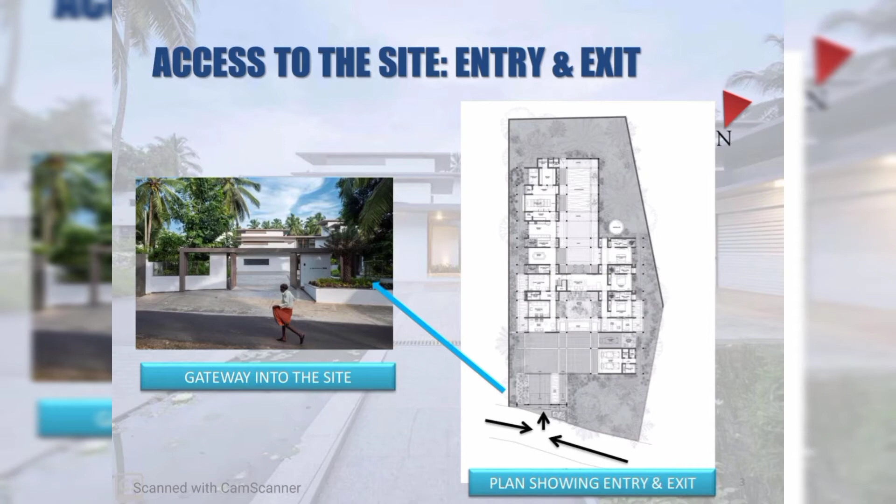First of all, here the plan shows site access. This is the only entry and exit to the site. The architect gave a wide open courtyard which the car can easily get into or out of, and exit through the main gate.

This is the orientation and positioning of the residence, a view from the road. First two views from the north side and other two from the west.

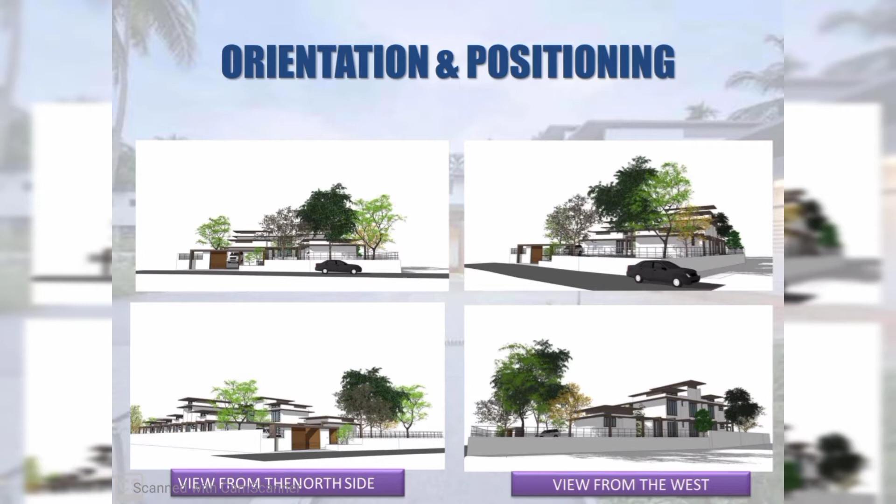To match up with the design and surrounding, the architect maintained dense vegetation to create an enjoyable medley. For the parking facilities, a porch with an area for parking 2 cars, and a garage with an area for 1 car.

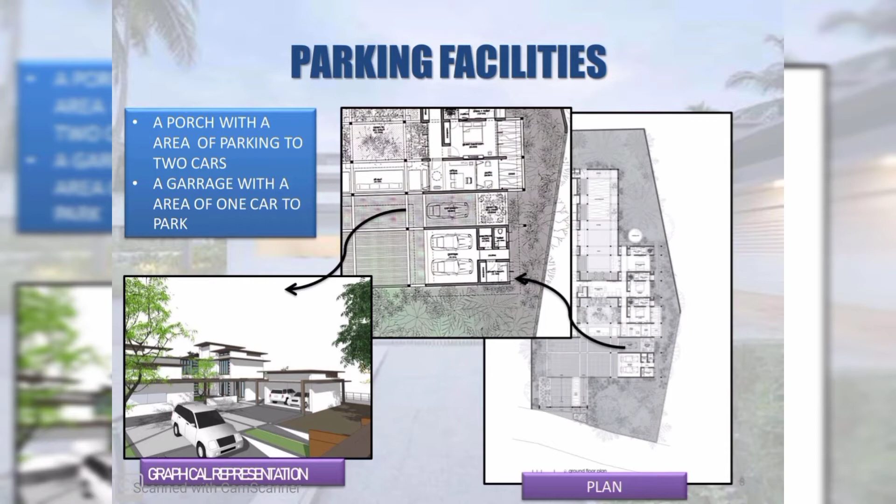Here gives a plan and a larger portion of the plan and a graphical representation showing the porch and the garage.

One of the client requirements was to keep sustainable features like solar panels, rainwater harvesting, etc. The architect fulfilled that client need by adding solar panels on the roof with natural ventilation. Also, the roof efficiently collects rainwater which is designated to a water collection chamber.

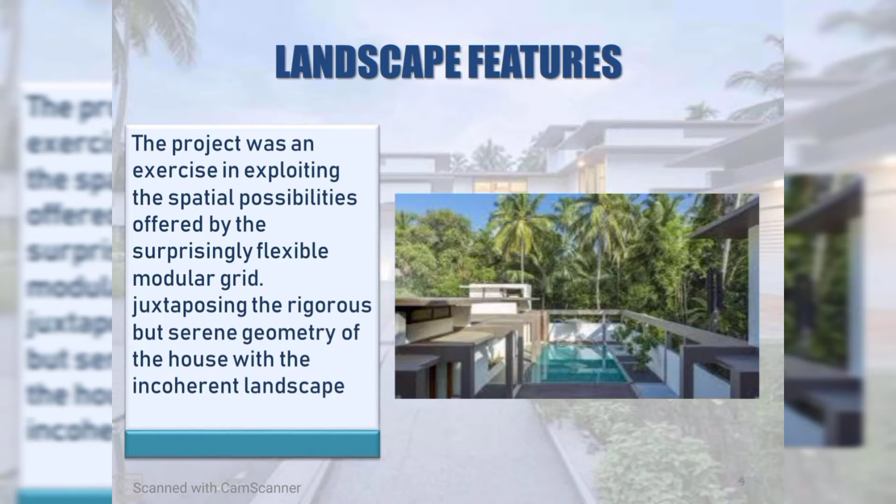The project was an exercise in exploiting the spatial possibilities offered by the surprisingly flexible modular grid, juxtaposing the rigorous but serene geometry of the house with the incoherent landscape.

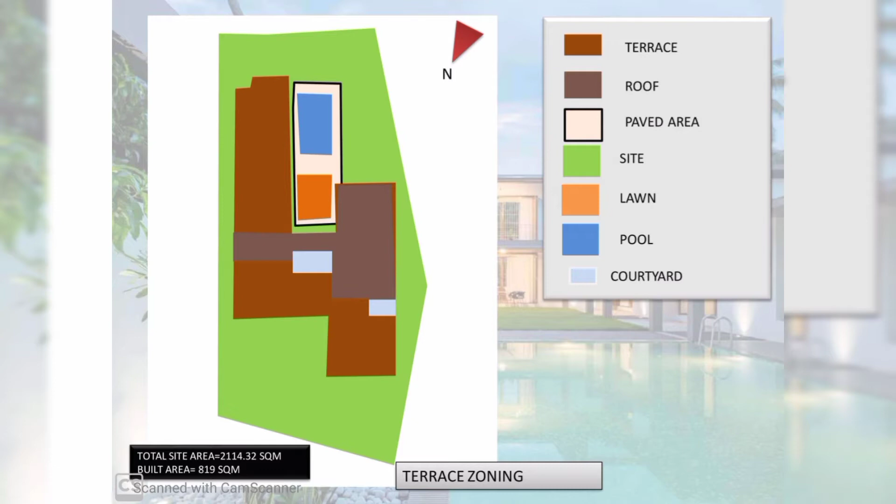And we go to the sections. We've taken the section from the north elevation. This is the first section, and in the vertical zoning shows the rooms and spaces, coming first in the section.

Here is the prayer or family living area with a double height roof and an informal living room. In between these two spaces comes the stairs to the family living in the first floor, and again stairs to the bedroom. Next section, same from the north elevation.

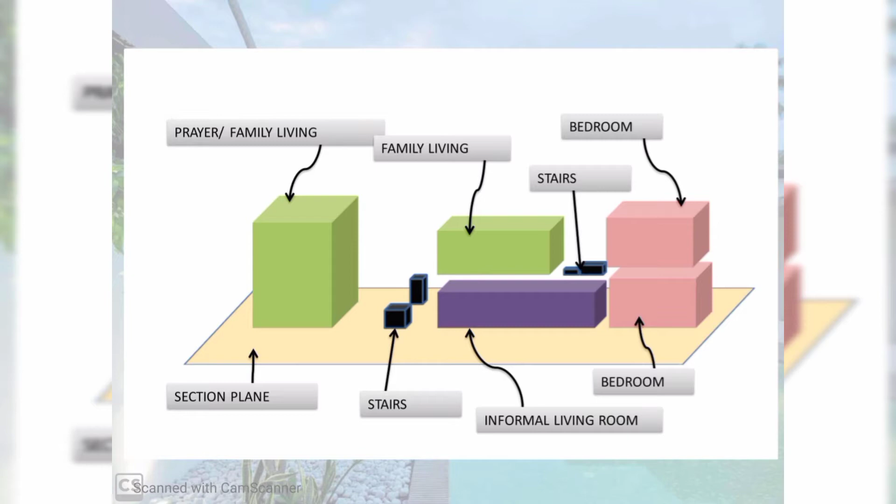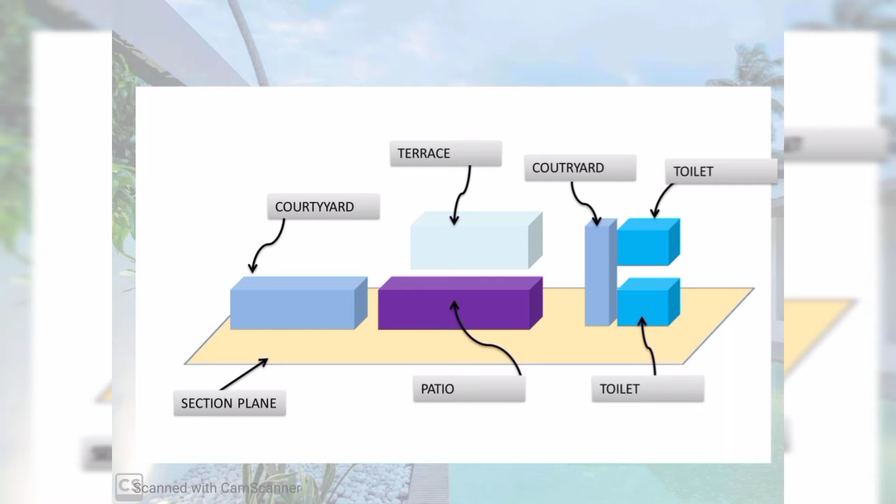With the internal courtyard, between the internal courtyard and patio, there is a passage to the next space without interrupting the circulation. On top of the patio is a terrace or balcony which is open from the family living in the first floor, and again a small courtyard near the toilets in both floors.

Section 3. The breakfast area with the open kitchen, and behind the kitchen there is a kitchen yard. These spaces also open to the lawn area, and the toilets are on the other side with a courtyard near to it.

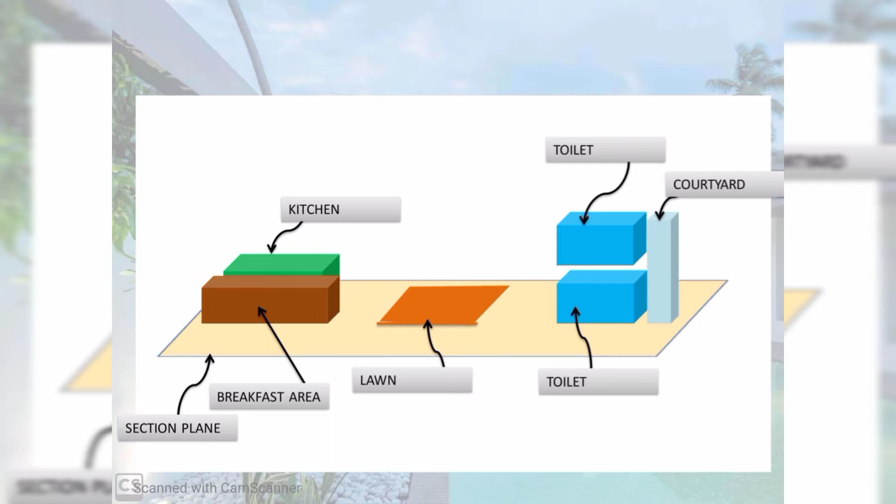The spaces are arranged based on the center of attraction. First of all, the sit-out. The sit-out is mainly attracted by the 3 fully opened walls, which face the large interior courtyard. It also leads to the formal sit-out and office space on the opposite side.

And then comes the other spaces with their designs and arrangement. Lijo Reny Architects has taken full advantage of Kerala's sunny tropical climate with its design of the house within the grid, a luxury residence that produces all of its own energy via rooftop solar panels.

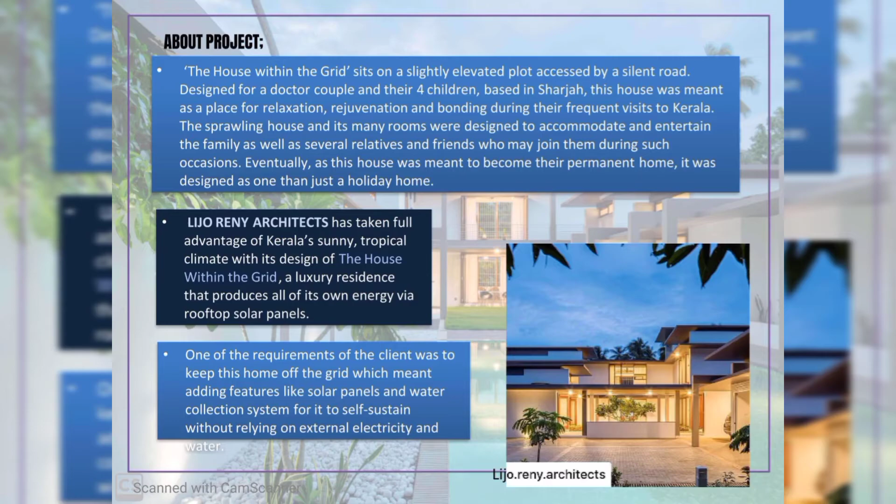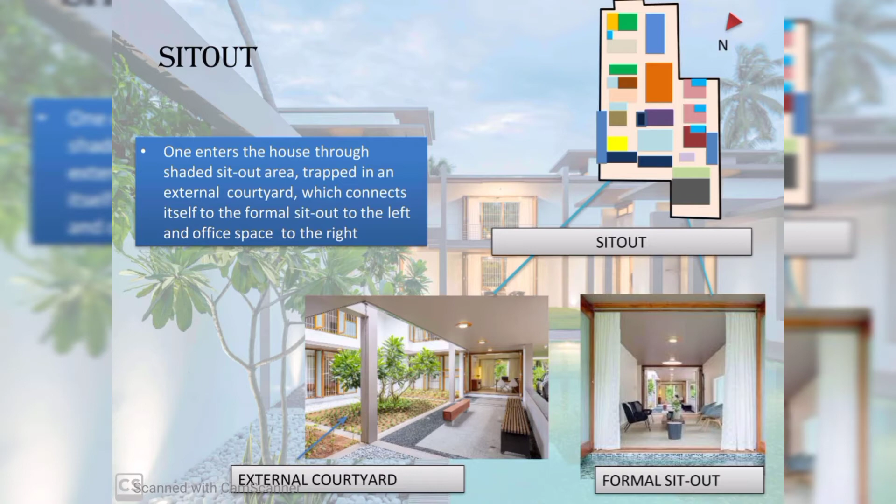One enters the house through a shaded sit-out area trapped in an external courtyard which connects itself to a formal sit-out to the left and an office space to the right. The staircases were positioned in these zones to make the circulation far more efficient.

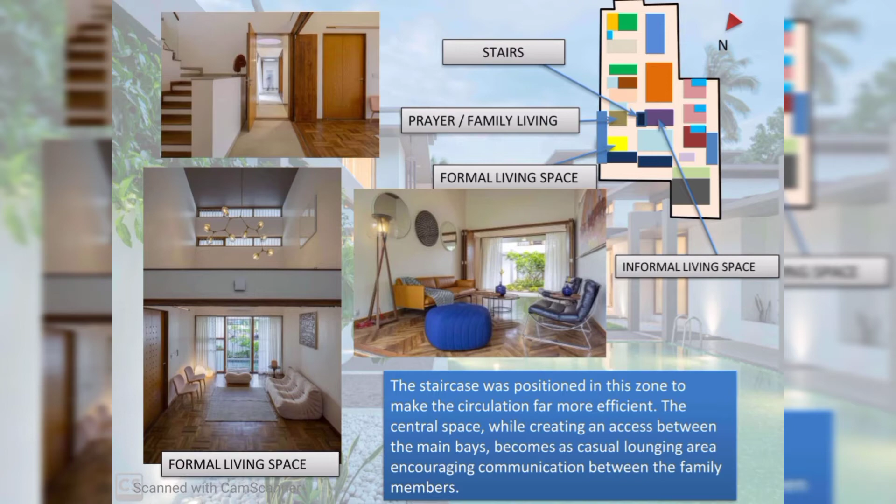The central space, while creating access between the main bays, becomes a casual lounging area encouraging communication between the family members. The spaces providing ventilation.

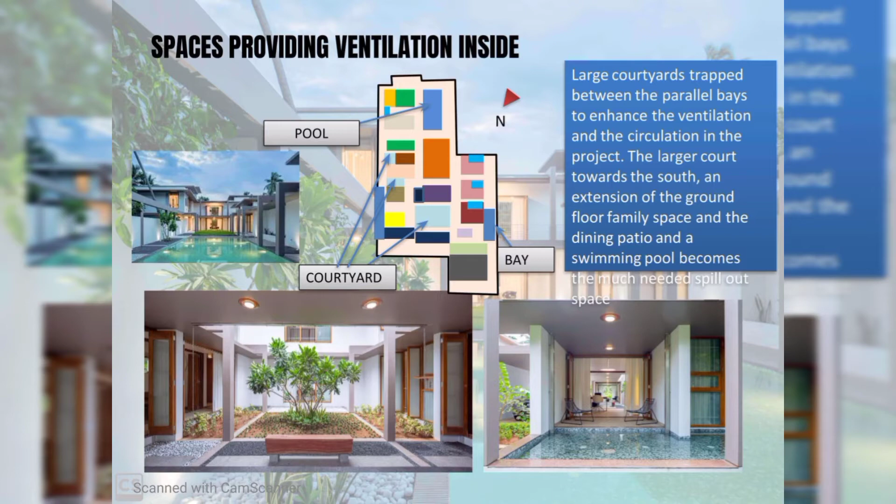A large courtyard trapped between the parallel bays enhances the ventilation and circulation in the project. The large court towards the south is an extension of the ground floor family space, and the dining patio and swimming pool become the much needed spill-out space.

The work areas: on the ground floor, the work area like the office is situated at the west side, and the dining room, breakfast area, and kitchen are situated at the east side.

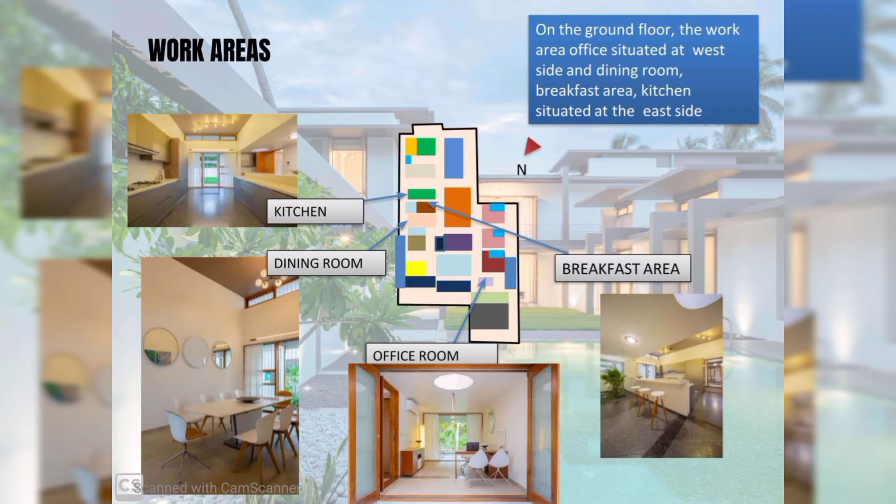The theme of the design: the house is composed of two distinct parallel bays connected in between. Each of these bays consists of a set of defined functional areas and a linear circulation spine that dissolves into the parent room wherever possible. A mix of primary and secondary function with its two different room widths creates a visible repetitive spatial pattern throughout the house.

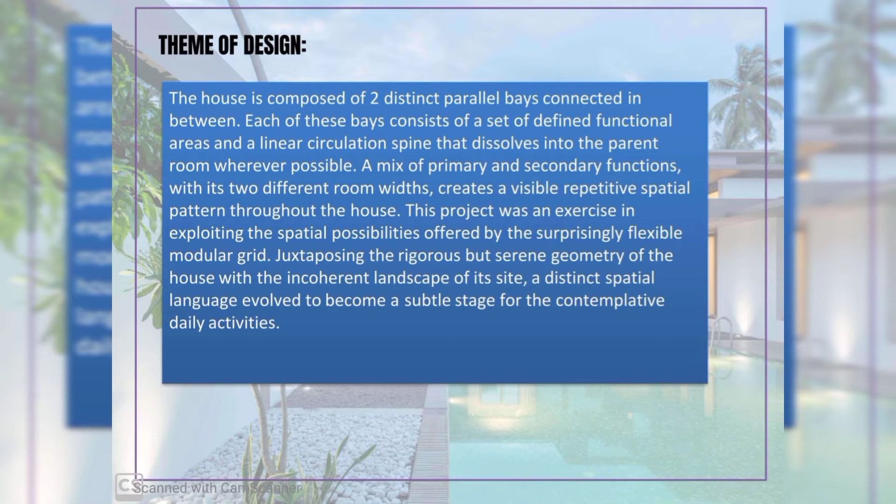The architects divide the home into two connected distinct parallel bays: a single-story bay housing the public and semi-private areas on the east side, and the double-story bay on the western side that comprises 6 suite bedrooms and a compact office space. Two large courtyards are located in between the bays.

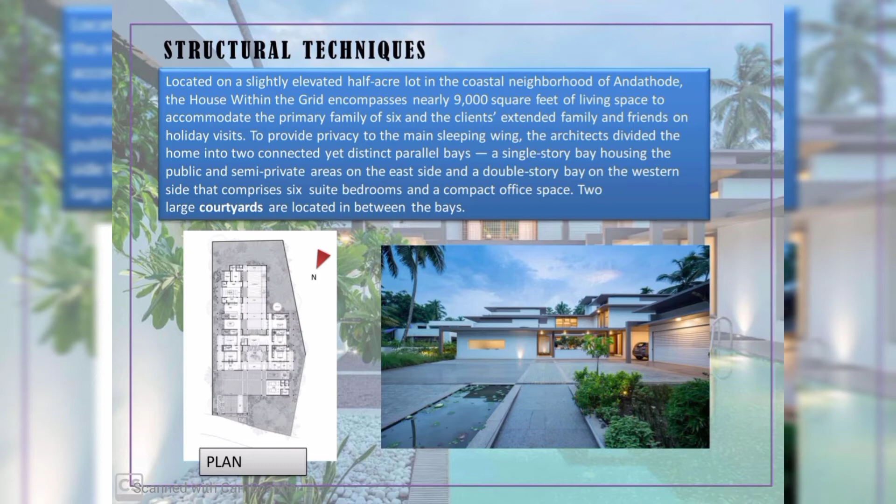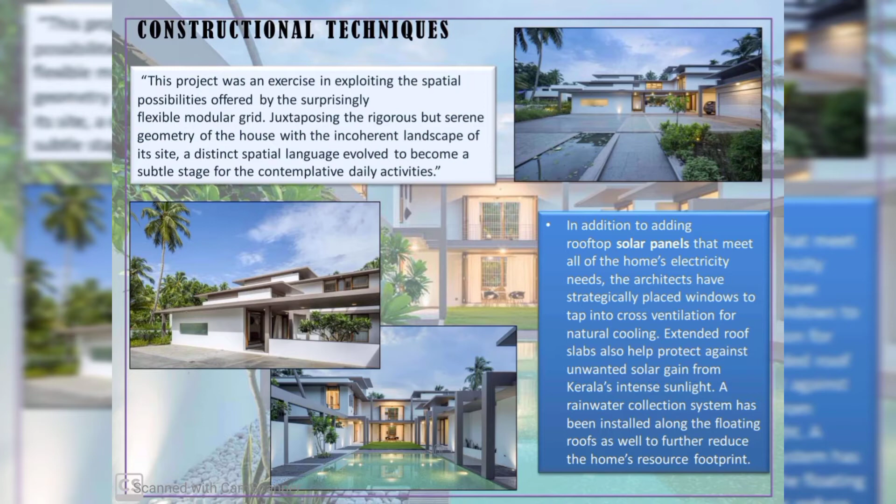Constructional techniques: this project was an exercise in exploiting the spatial possibilities offered by the surprisingly flexible modular grid. In addition to adding rooftop solar panels that meet all of the home's electricity needs, the architects have strategically placed windows to tap into cross ventilation for natural cooling. Extended roof slabs also help protect against unwanted solar gain from Kerala's intense sunlight. A rainwater collection system has been installed along the floating roof to further reduce the home's resource footprint.

Material study at site level: cobblestone and granite stone are used for the outside courtyard, and lawn grass is used for the lawn area. Steps: the stairway design is set in wood, featuring wood steps that are the same color as the hardwood floors in the living space. The railings, however, are painted all white.

Material study at building level: Kajaria vitrified tiles and granite are used for flooring of common spaces like office space, sit-out, formal sit-out, etc. Nitco tiles are used for the flooring of the praying area, family living, and bedrooms.

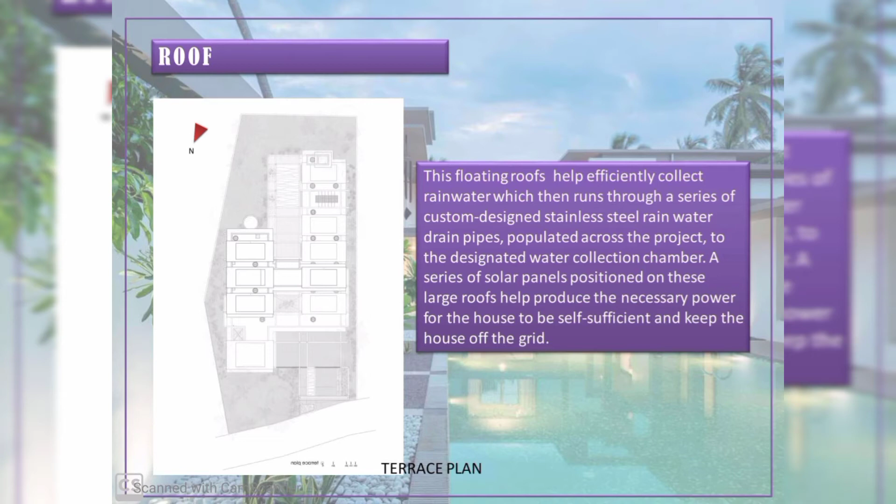These floating roofs help efficiently collect rainwater, which then runs through a series of custom-designed stainless steel rainwater drain pipes populated across the project, into the designated water collection chamber. A series of solar panels positioned on the large roofs help produce the necessary power for the house to be self-sufficient and keep the house off the grid.

The kitchen: silver metals and white color give the kitchen an elegant look. The architect has taken full advantage of Kerala's sunny tropical climate. The strategically laid out plan, while providing privacy to the family members, also facilitates cross ventilation by channeling the seasonal shift of predominant wind through its space by virtue of its orientation. This keeps the rooms as airy as possible, maintaining the internal temperature at a possible low. The undulating volumes, along with the several cantilevered slabs, shade each other in the shifting tropical sun.

Form of the structure: the design looks like rectangular boxes constructed in a grid-like structure. I hope you all understood our case study about the Indian context, the house within the grid.

Thank you. The Toblerone House, Brazil.

The whole project of Toblerone House spans over an area of 1453 square meters, with the house taking up around 590 square meters. Located at Sao Paulo, Brazil, this project was accomplished in 2011 by architect Diana Radomysler and Marcio Kogan of Studio MK27.

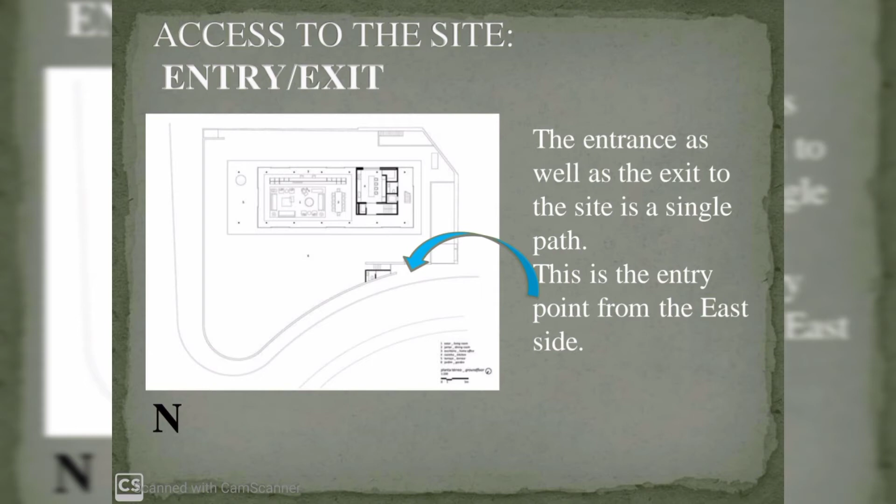The entrance as well as the exit to the site is a single path. The arrow shows the entry point from the east side. Further, the parking shed is shown. The shape of the land allowed for a longitudinal implanting of the house, with spatial permeability between the two extreme areas with a loose canopy in the garden.

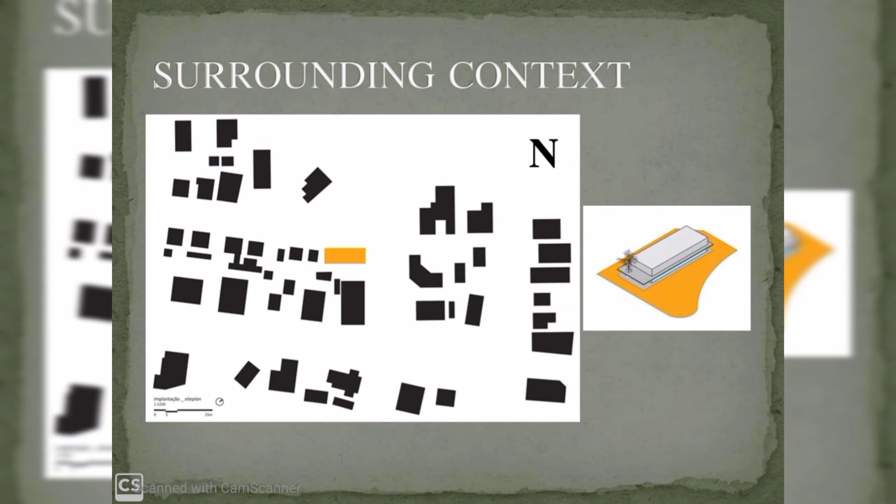It's well kept in the natural landscape and has interior done to match this feature. The nature surrounding the site is mostly left as it is. The interior has been decorated in muted shades in order to remain sympathetic with the natural landscape around.

Landscaping choices can make a big impact in building water consumption. By using trees, plants and grasses that are native to the area, irrigation needs are reduced. By planting trees that shade the roof and windows during the hottest time of the day, solar heat gain inside the building can be reduced.

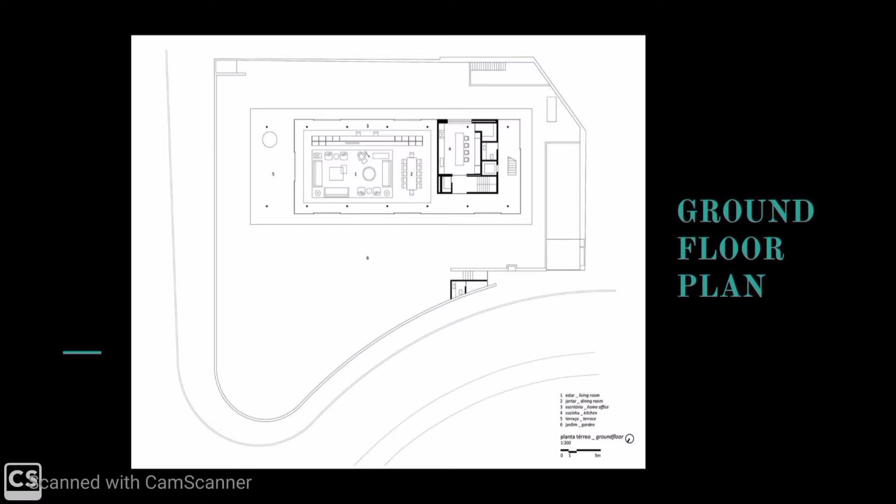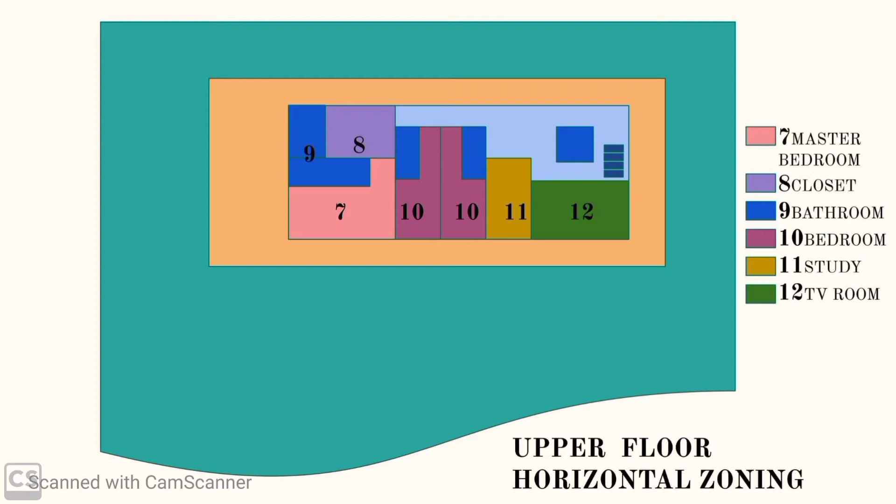Beginning with the front view of the residence, what comes next is the ground floor plan of the two-story building. It consists of a living room, a dining hall, and an office integrated together with a kitchen nearby. The stairs then take you to the upper floor, which has a home theater, a study, 2 bedrooms with attached washrooms, and finally a master bedroom with an attached closet and washroom. These are the horizontal and vertical zoning of the respective floors.

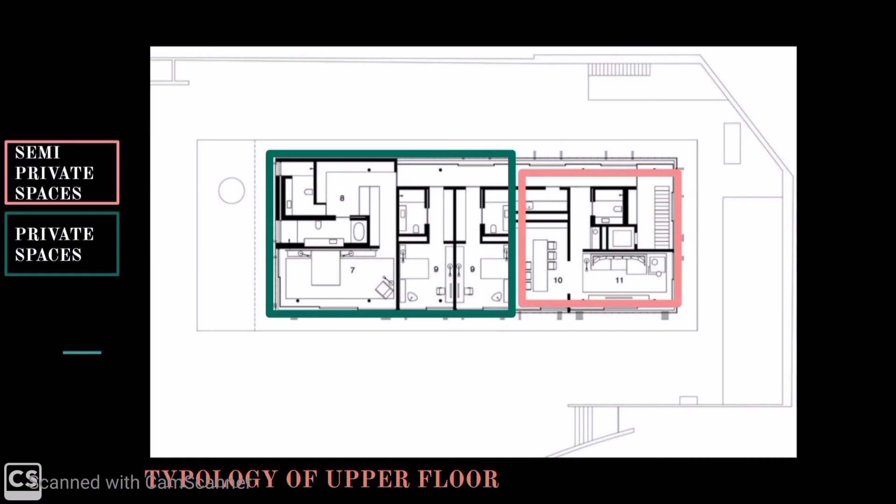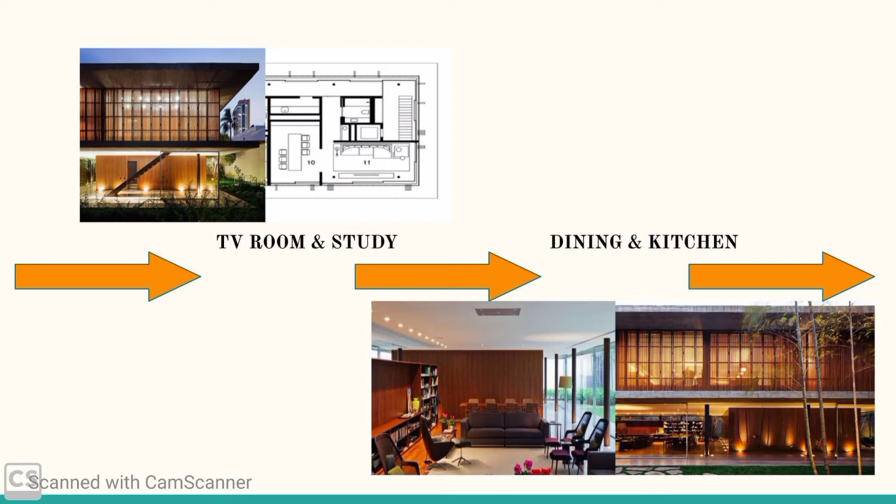The hierarchy comes next, ordered in the manner such that the center of attraction, or rather the public spaces, comes first. Starting from the living room to the terrace, the TV room, study, dining and kitchen, it ends in bedrooms.

A free ground floor with large sliding glass doors which support a wooden box delimited by concrete beams is the overall concept of the project. The ground floor houses the collective program with the living room, utilities and kitchen. On the first floor are the 3 bedrooms, the den and home theatre.

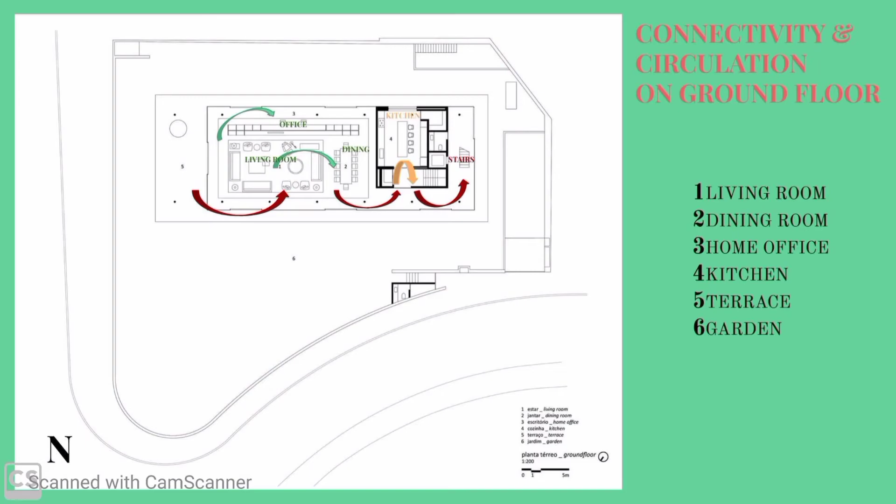There is a total of 2 common rooms on the ground floor: living, dining, office, and patio all together into a single space, and then the kitchen with its utilities.

With the living areas on the ground floor surrounded by floor-to-ceiling clear glass walls, the outside space merges seamlessly with the interior. Public spaces are organized within this transparent story surrounded by the natural outdoor garden.

The office integrated into the living room is delimited by a stand free from any other element. This office is connected with the back patio, which has a beautiful Jaboticaba tree.

The living room extends beyond the vitreous envelope to an exterior veranda and patio with a hanging fireplace and a circular void in the ceiling embracing 2 trees.

On the first floor are the 3 bedrooms, the den, and a home theatre, with a total of 10 rooms.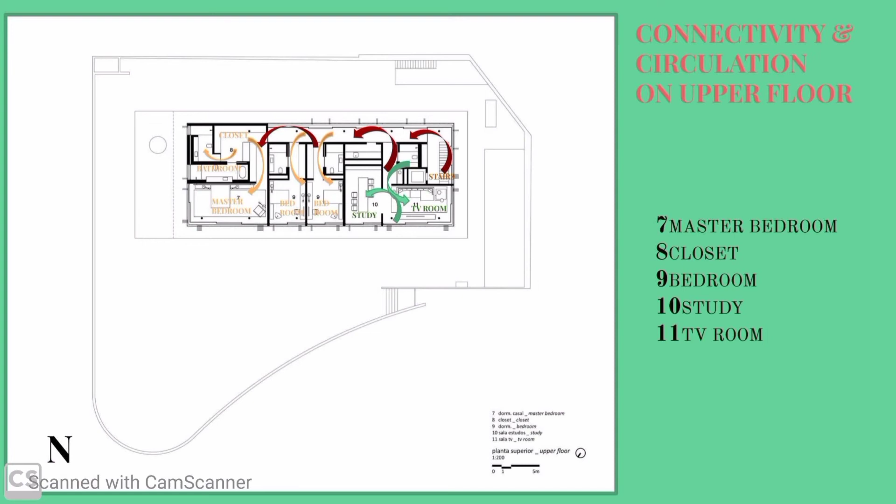Master bedroom with attached bathroom and closet, 2 bedrooms with individual attached bathrooms, a study connected to a TV room, with a tiny washroom next to the stairs.

The master bedroom and bathroom open to a beam, the roof of the veranda, and look out over the treetops that perfume the beam of the ground floor.

The wooden screens are also retractable to allow either an open field or provide private seclusion, whilst also enhancing the exterior visual of the construction.

The simplicity of Toblerone House surpasses the organization of the house, the solutions for environmental comfort, and even the everyday use by the inhabitants. Little surprises complete this architecture.

With a ground floor surrounded by retractable glass walls and the upstairs encased in a cocoon of wood slat screens, this great example of modern architecture sits comfortably in its natural surroundings whilst still standing as a contemporary style statement.

The attractive modern residence is constructed of 3 long concrete slabs that hold the 2 distinctive floors and overhang an outdoor lounge area complete with an exterior fireplace for cozying up evening chats, dinners, and get-togethers.

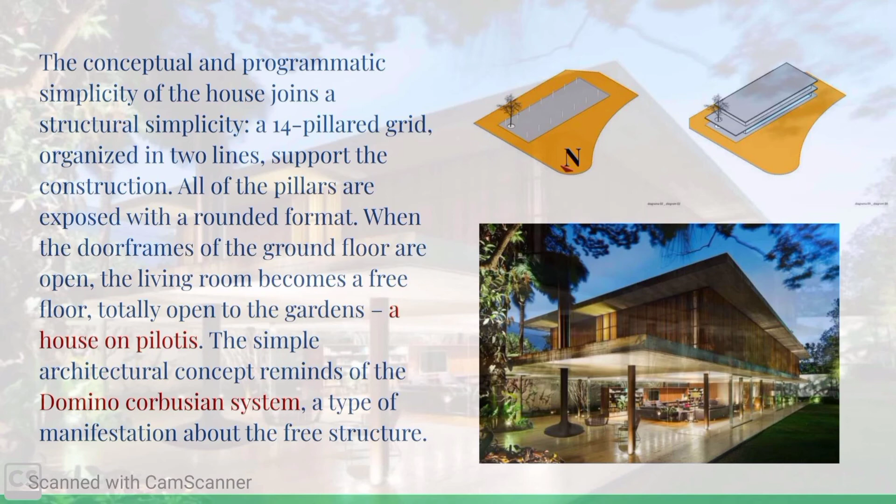The conceptual and programmatic simplicity of the house joins a structural simplicity. A 14-pillared grid organized in 2 lines supports the construction. All of the pillars are exposed with a rounded format.

When the door frames of the ground floor are open, the living room becomes a free floor, totally open to the gardens—a house on pilotis.

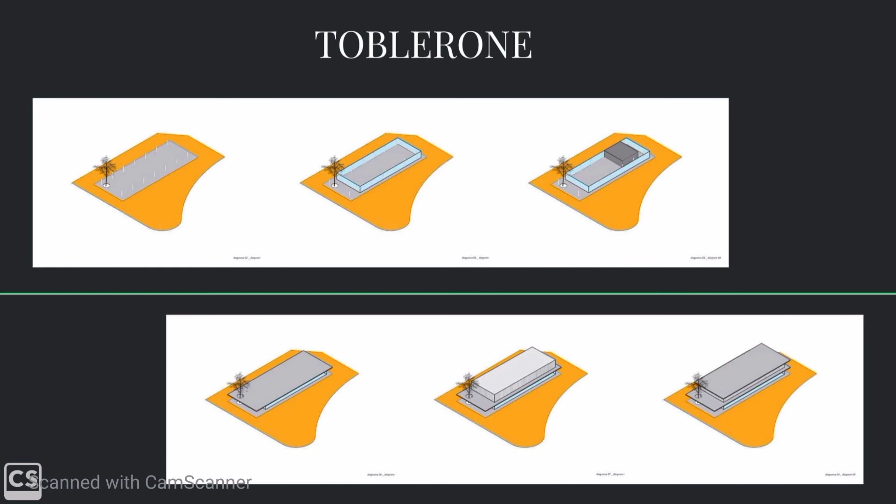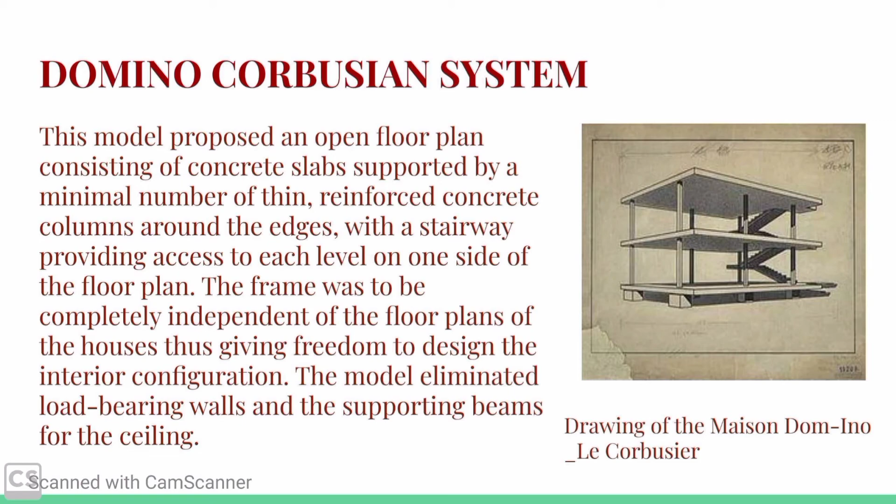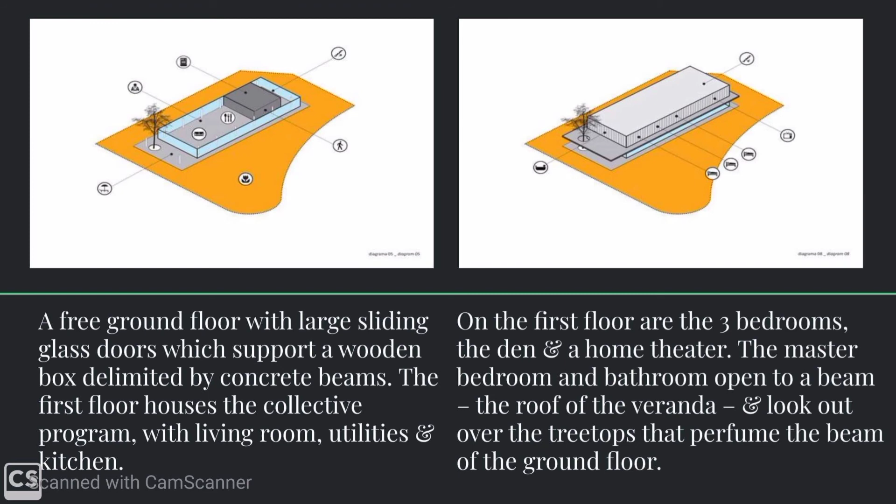The simple architectural concept reminds of the Domino-Corbusian system, a type of manifestation about the free structure. The Domino-Corbusian system proposed an open floor plan consisting of concrete slabs supported by a minimal number of thin reinforced concrete columns around the edges, with a stairway providing access to each level on one side of the floor plan.

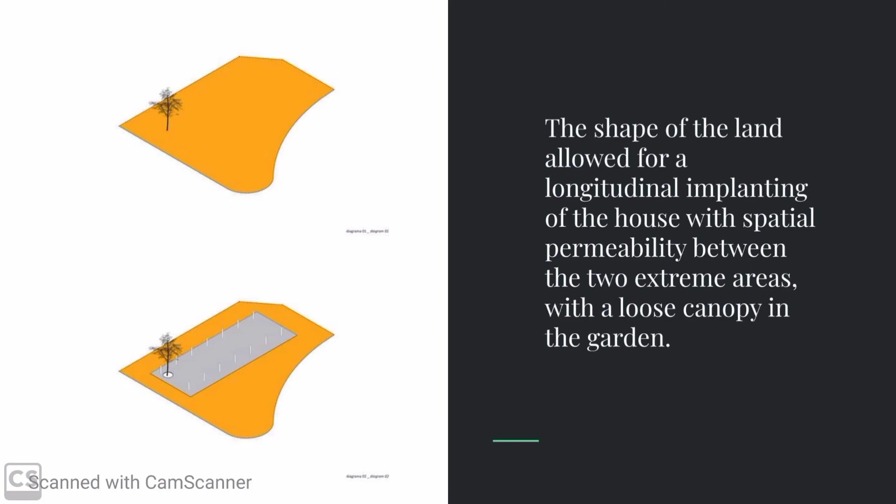The frame was to be completely independent of the floor plan of the houses, thus giving freedom to design the interior configuration. The model eliminated load-bearing walls and the supporting beams for the ceiling.

Material study: the apparent architectural simplicity ends up revealing complex spaces. With the living areas on the ground floor surrounded by floor-to-ceiling clear glass walls, the outdoor merges seamlessly with the interior spaces.

The retractable wooden screens allow either an open field or provide private seclusion, whilst also enhancing the exterior visual of the construction.

The wood establishes a dialogue with the other raw material, such as the concrete, and is used as a sun filter for the bedrooms. Each piece of this solid has a triangular shape and was fixed to folding doors, able to be kept open according to the need of the users.

The interior has been decorated in muted shades in order to remain sympathetic with the surrounding natural landscape, as mentioned before.

Climatic considerations: the Tropic of Capricorn passes through Sao Paulo and roughly marks the boundary between the tropical and temperate areas of South America.

Because of its elevation, however, Sao Paulo enjoys a distinctly temperate climate. July is the coldest month with an average temperature of 14 degrees Celsius and occasional frost. The warmest is February, which averages 21 degrees Celsius.

Humidity and air pollution combine to form a mist that often hangs over the city. Rainfall is abundant, particularly during the summer season from October through March, averaging 56 inches per year.